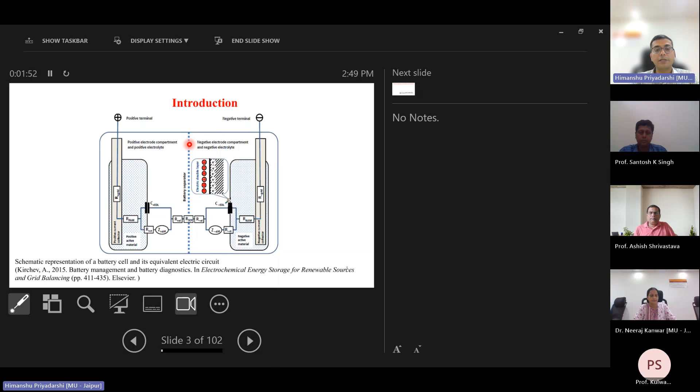This naturally propelled me to think that one has to work at the device level, at the root level of the battery. And then of course there are three pertinent parameters in anything: first is how we procure it, so generation, then the operation, and then its recycling. I have on purpose not used 'destruction' because nature naturally operates on the concept of recycling. So all these three parameters have to be taken out, and that, in a crux, is the motivation and the introduction of it.

So this was the previous schematic, and in this slide I have tried to explain the basic components, because it will be useful as I develop the story of this.

This is the cathode of a lithium ion cell, where the purple balls model the lithium ions, sitting snugly into the lithium LMO or its active material composite. And this is the anode, where again the purple balls represent the lithium ions or lithium atoms, and these two-dimensional networks represent the graphitic layers.

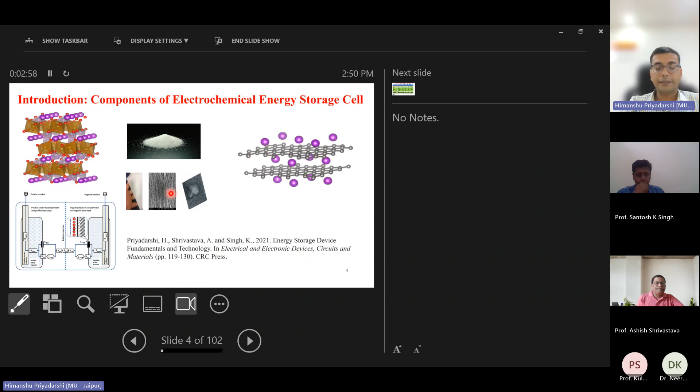And of course, whenever there is a battery, apart from the electrodes, there will be the electrolyte. This represents the salt, and then the separator. The separator is meant to ensure galvanic separation, although there may be ionic exchange between both the electrodes.

The market size is simply humongous because energy storage devices are practically ubiquitous, whether it is Internet of Things, wearable electronics, RFID patches, handhelds, electric vehicles, or renewable energy storage applications. They are everywhere.

The range or the functional capacity in terms of ampere hours varies from milliampere hours to greater than kiloampere hours, and the features are also variegated based on that.

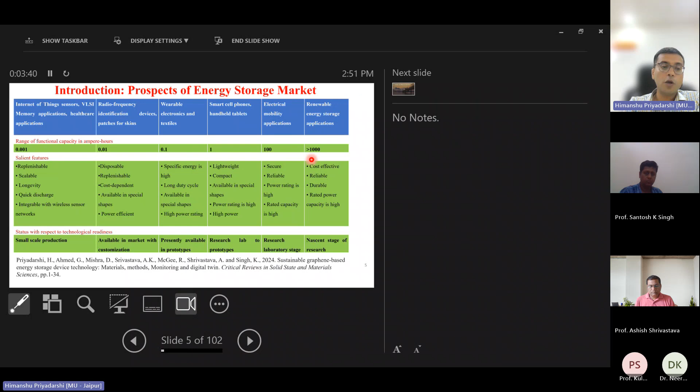Now coming to the motivation. Every time, particularly when I go for a petroleum refill, I look at the meter. It's very costly and it is at the verge of extinction.

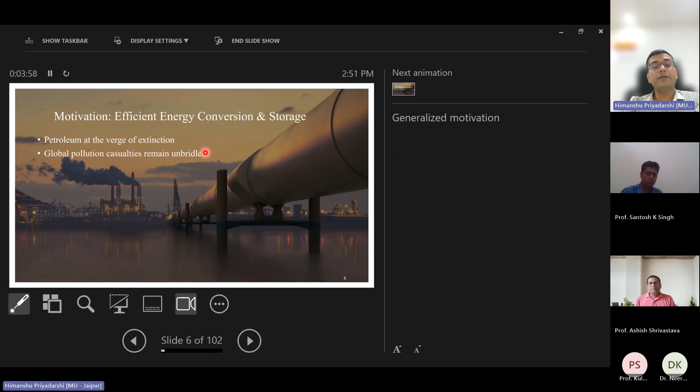Global pollution casualties remain unbridled, more than any other thing, more than any natural catastrophe, more than any terrorist attack. The pollution calamities and casualties remain unbridled.

But side by side, since we are living in a progressive world where we are all interested in improved standards of living, we need more energy per capita.

Another motivation was, when I was studying power electronics, I was simply surprised to know why power electronics devices are required, because the amount of power generated, only one-sixth of that reaches the consumer end.

Energy security is also required, which is very important for any nation. And finally, the motivation was that, being an engineer by profession, I must contribute in my own humble capacity for a technological support system for efficient energy conversion and storage.

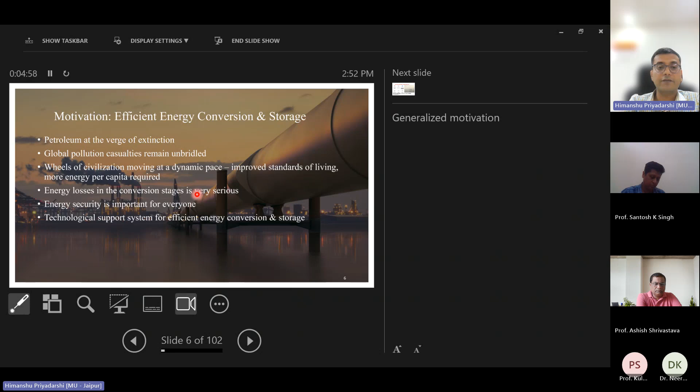The bottom line is that the consumer, the customer, is not much concerned about the inside of it. One of the main motivations of a consumer or a four-wheeler customer is that the quality and comfort should not be compromised.

So finally, to summarize, previously I used to think that the empathy for ecology and environment and the pressure of consumer economics was a dichotomous topic, but actually it depends upon our attitude. It's about convergence also, because for example, we say that an engineer must have a societal sensitivity and environmental empathy.

But unfortunately, when he gets into the research, he is forced by consumer economics. But can we dovetail consumer economics into environment and empathy? Of course, it depends upon education.

So if we think of this as a convergence and not a dichotomy, then the quadruple bottom line of corporate social responsibility - that is profitability, people, planet, and problem-solving platform - all will be achieved.

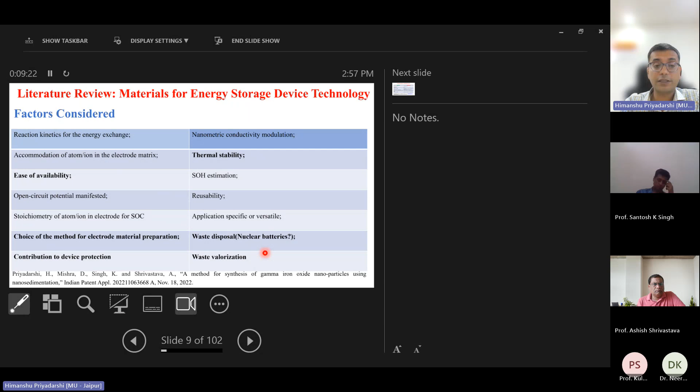I was talking about lithium ion cells, but is lithium ion cell everything, or should we resort only to this option? Of course, it has advantages: lightweight and compact, energy density is commendable, charge retentivity is high, with a good number of charge-discharge cycles, and higher operating voltage. But there are disadvantages too, and as we go further, we'll see those disadvantages.

It is a very water intensive process. Brine extraction is a particularly water intensive method. Brine, by the way, is one of the principal sources of lithium, and it uses an estimated 500,000 gallons of water to produce just 1 metric ton of lithium. There have been reports of aquatic ecosystem damage because of this.

Recycling processes still remain costly and immature. There are debatable theories on this, but one report says that 14 million tons of lithium is left, which corresponds to 165 times the production volume in 2018. So we need to think of alternative materials.

In connection with the previous slide, we can see that we should not tolerate environmental damage. Why? Because all parts of the environment have feelings, and it is our responsibility to protect them. If we dodge this responsibility, we will not be able to dodge the consequences of dodging that responsibility.

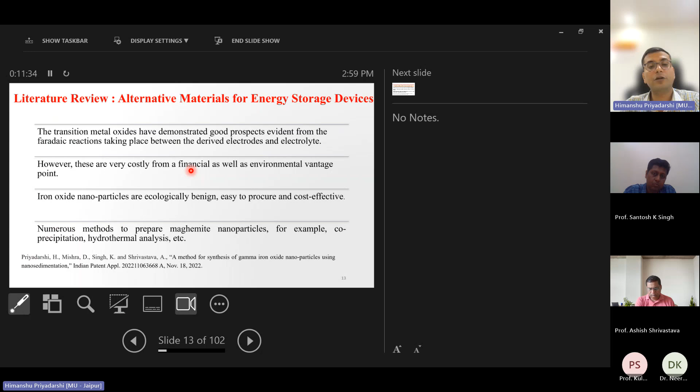But out of these, iron is very useful. Why? Because it is easy to procure, can be derived from waste, and is ecologically benign, as we have seen that the methodology used to make them is very environmentally congenial.

So the point I was making is that when we use iron oxide nanoparticles, or more precisely gamma Fe2O3 nanoparticles, maghemite nanoparticles, the oxidation state modulates between ferrous and ferric - ferrous Fe2+ and ferric Fe3+ - making it capable of catalyzing abundant electron transfer. That is also a good part of this, and people have demonstrated iron ion batteries.

Another aspect is that it is amenable to state estimation - for example, the change from ferrous to ferric. As we go further we will prove it, and it is one of our novel contributions, how we have proved it.

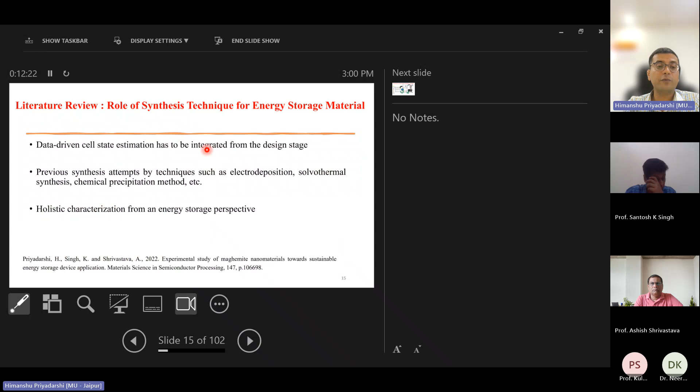Coming to the different aspects, just wanted to have the totality of the picture. This is the battery, this is one of the cells, and we want to make cells from waste. We want to gather that data and share it openly - it's not that we will keep it secret, it's not medical data which needs to be federated.

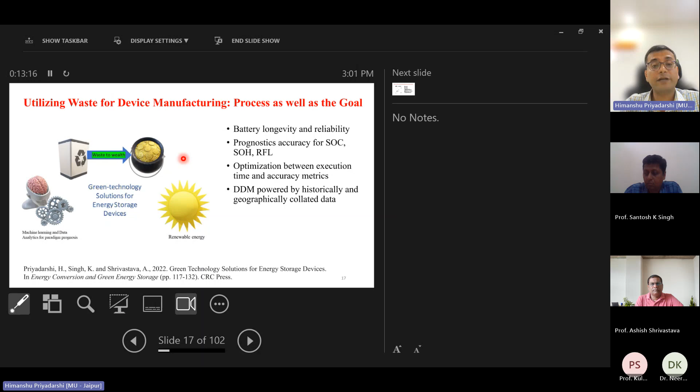Of course, when things scale up, there might be arguments for that. But even if it is federated later, let's say their data is federated, that is not a problem - at least the skeleton will be available. My gut feeling is that if we take such an approach, we will have a lot of benefits, including profitability, battery longevity, and optimization between all the parameters of state estimation.

Now coming to states - this was a literature review regarding procurement. Now what are the different states? State of charge: generally from a macroscopic, electrically observable point of view, state of charge is the ratio of the amount of capacity of the charge remaining in the battery upon the rated capacity.

So now coming to research gaps, having defined the states, the procurement limitation, and the material considerations, the research gap is identified in two parts. This one pertains to the material side, material engineering aspects. Although researchers have synthesized iron oxide nanoparticles, they have not done the doping studies except one, and none have done magnetization studies as far as energy storage considerations. Moreover, band gap studies have not been done.

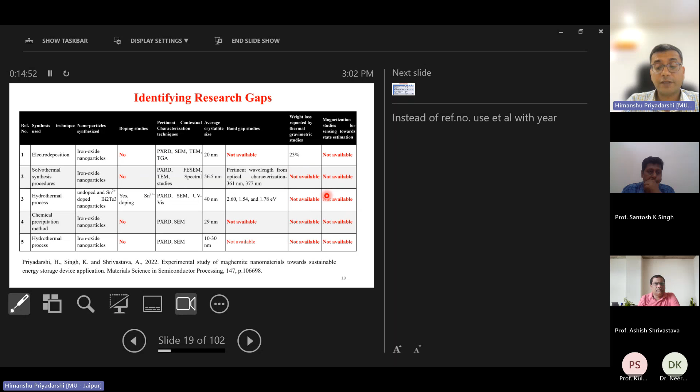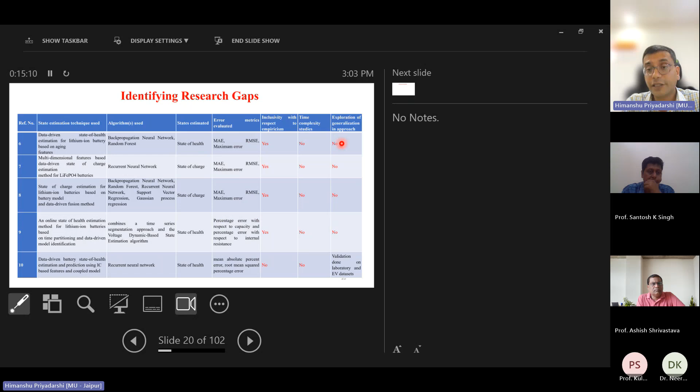These were the gaps, and as far as state estimation is concerned, these are very recent references. The error metrics, if we see, are mostly limited to mean absolute error or root mean square error, but they have not gone to collate it, generalized their model, nor included time complexity studies.

With this, we have identified the objectives and the definition of the problem, which I would like to read. Affordable energy storage is indispensable for attaining the sustainable development goals. Why? We have the ambition that the modern power system should be 100% renewable. A cent percent renewable power grid is required.

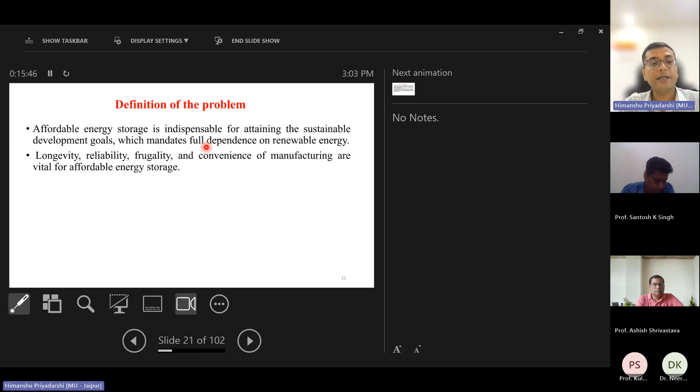So if we are targeting that, affordable energy storage is indispensable, and in that, longevity, reliability, frugality, and convenience of manufacturing are very important. Why? Because the battery has to be long lived, reliability should be there, and each of these is a separate research topic. Frugality and convenience of manufacturing is also there.

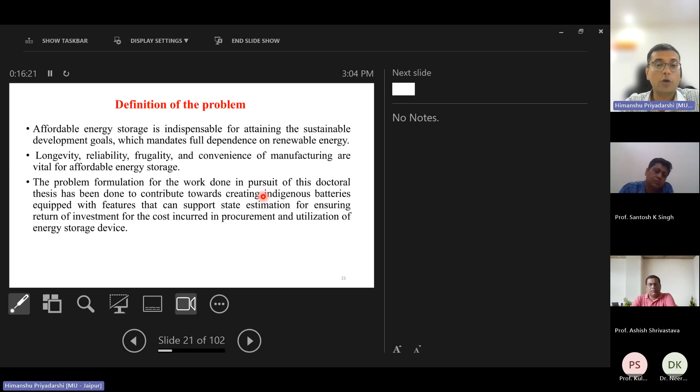So the problem formulation for the work done in pursuance of this doctoral thesis has been done to contribute towards creating indigenous batteries equipped with features that can support state estimation, ensuring return on investment for the cost incurred in procurement as well as utilization of the energy storage device. This is our overall vision. It will be so nice if this can be implemented in a more robust and realistic way.

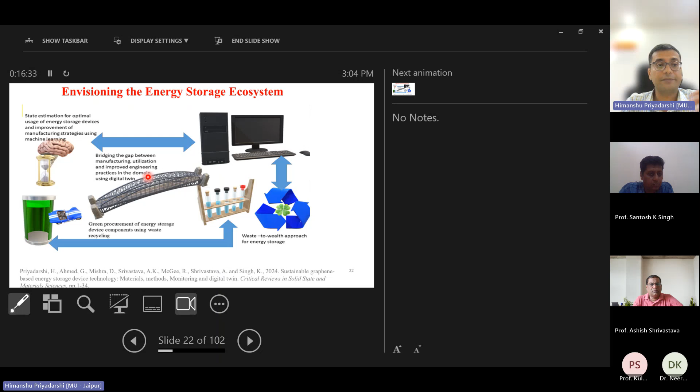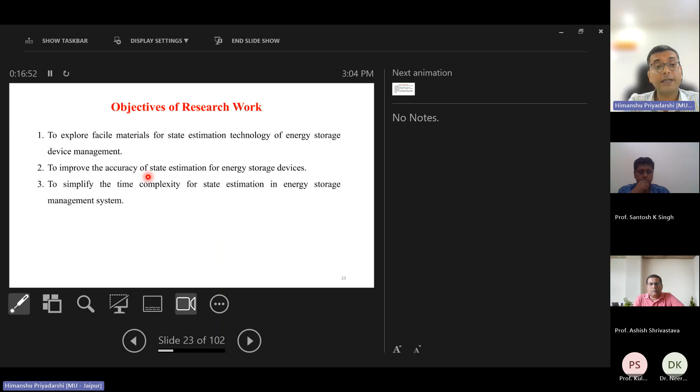Objectives: our first objective was to explore facile materials for energy storage device management and to improve their accuracy. As far as state estimation is concerned, to simplify the time complexity, and to investigate the efficacy of machine learning techniques for energy storage devices. This was objective number 4.

So the methodology, to summarize: choose materials which are locally available, synthesize the precursors, and synthesize the energy storage materials with state estimation amenability, using a data-driven approach. Why am I pitching for a data-driven approach? Because today we have a lot of computational power available, so reductionism is okay wherever required. It may be application specific to use a reductionist model, but data-driven models have a lot to offer in terms of detailing, and by paying careful attention to details we can get things which would have been ignored otherwise.

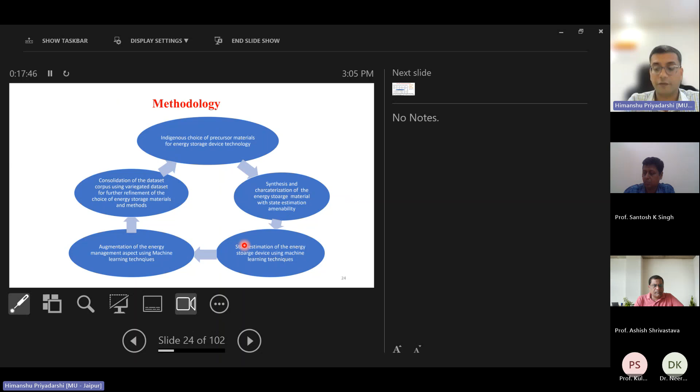Coming to objective number 1, what are the contributions? While exploring for facile materials, we devised a method with which we synthesized our nanomaterial, an energy storage nanomaterial. This novel process sequence optimization has been done in our lab itself, without procuring anything new costly. Scalability has also been explored after the comment by the honorable examiner. We have recently explored that it can be scaled up to 6 times, and moreover it was time invariant also.

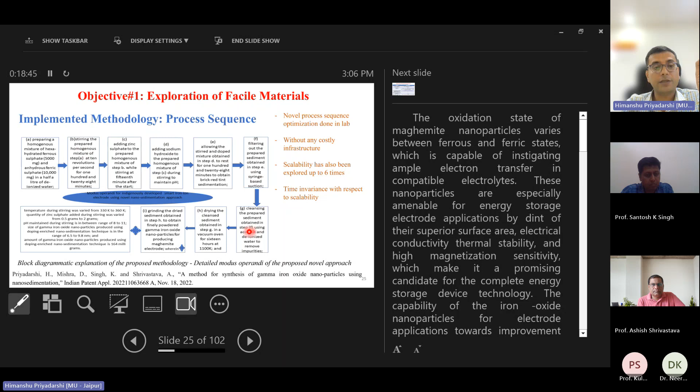So what we did: we took the precursors, the stirring was done at the given specification, then the doping was done, and then the alkaline was added and allowed to settle. Then filtering was done once the sediment was formed, it was allowed to be filtered, then cleansed, dried, and finally it was ready for being characterized.

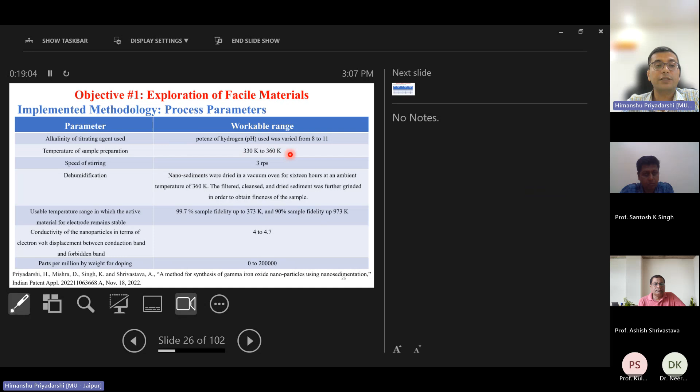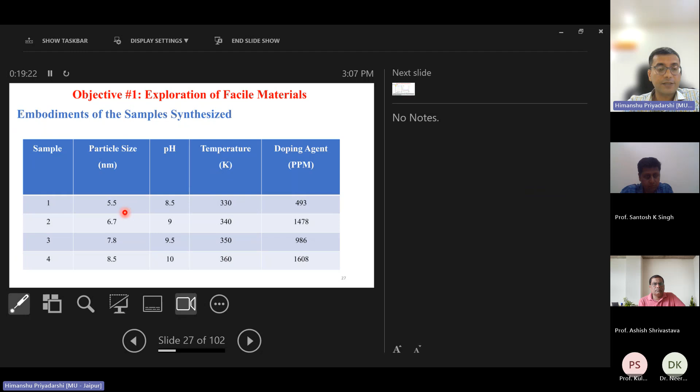These are the different parameters and their workable ranges. For example, the alkalinity of the titrating agent was kept from 8 to 11. Temperature of sample preparation was from 330 Kelvin to 360 Kelvin. The speed of stirring was at a given level. Then these are the different parameters, like the doping level, the temperature, for 4 samples, and their particle size, which has been in the nanometric level — very encouraging for us.

As far as characterization goes, we go first of all for the fingerprint — the XRD. Often by material scientists, the XRD method is called fingerprint identification. For any material, the reference is there.

We need to validate whether the material has been formed or not using X-ray characterization. Side by side, we have also done band gap measurement. Why? Because if we see the band gap of our materials, the maghemite nanoparticles, iron nanoparticles, at bulk level it is 2.2 electron volt, but it has shot up considerably.

So this conductivity modulation again proves that this is amenable for energy storage material. For example, if we go to the introductory slide where I was referring that schematic of the battery, even the active material of the electrode contributes to the resistance when it is connected to the grid.

So all these parameters have to be considered. After all, what is resistance? Resistance, as a lumped circuit parameter, we say that it is resistivity length upon area. But what is resistivity? Resistivity depends upon the mobility of the carriers, and other microscopic parameters.

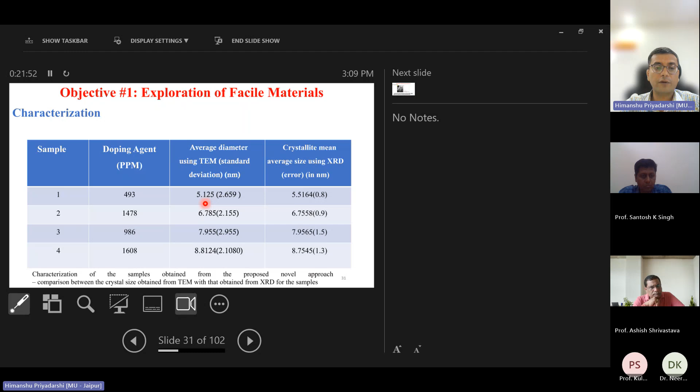Using TEM, if we can make a comparison, the crystallite size which was found out using Scherrer's formula was 5.5 nanometer with an error of 0.8, and using transmission electron microscopy it was 5.125. They are nearly in agreement with each other.

So what we do here, we get the image, and there is an image software which automatically gives us the calculation, the standard size and error, everything it gives.

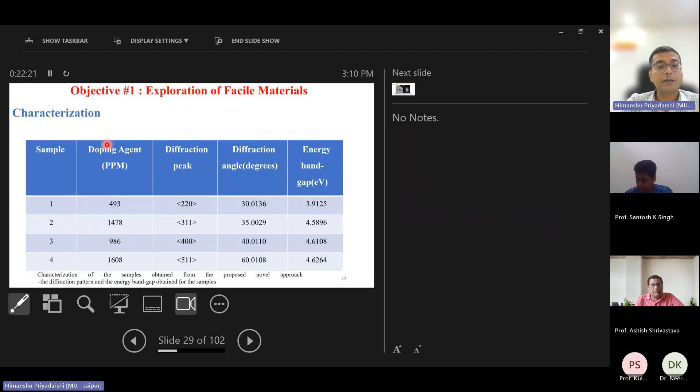FESEM, that is field emission scanning electron microscopy, also confirmed our results that the nanoparticles being formed are in the nanometric range, and the constituents were also in agreement, like iron and zinc. Zinc was the dopant, iron was the main precursor.

Now coming to the alignment with the publication, for this objective we have filed one patent which is under examination. We have 2 journals, and we have these book chapters and conference proceedings.

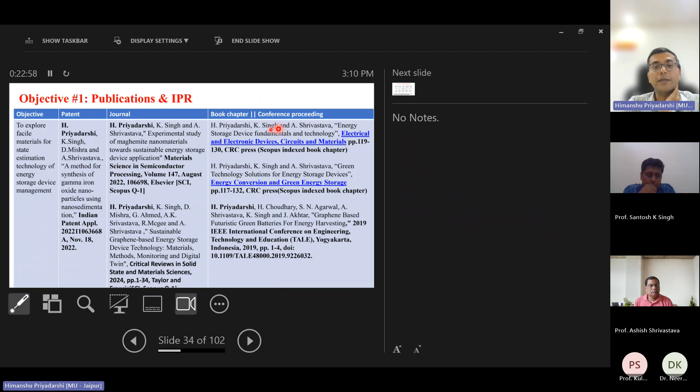Now with your kind permission, I will come to objective number 2: state estimation amenability. Here we need to check the state estimation amenability. So the basic philosophy was that whenever we are trying to develop this novel method which we have claimed, what are the advantages of it?

For example, if we have affordable batteries, it will increase DG penetration. DG stands for distributed generation, and it will overcome the dependence on costly electrochemical energy techniques. There will be more return on investment. It will reduce the carbon footprint, lesser life cycle costing, and better safety also.

If it contributes to the accurate state estimation, if the energy storage nanoparticle which has been synthesized contributes to better state estimation, naturally it will raise the flag that the state of charge has gone to dangerous levels. So that is one advantage.

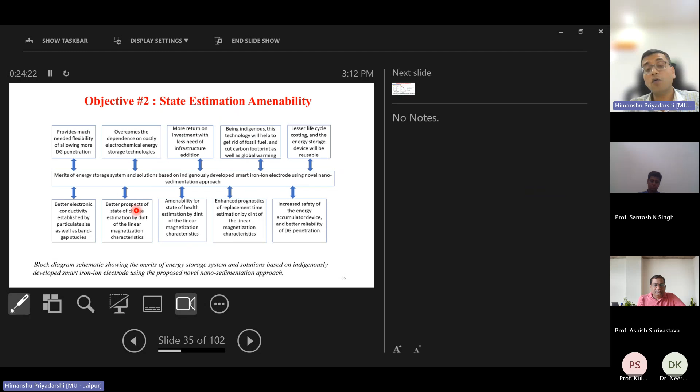Better prognostics, when a battery has to be replaced for being recycled, and all these characteristics. But how do we attain that, that is what we are going to establish here. I mentioned during the research gap identification that magnetic characterization was one important gap which we have addressed.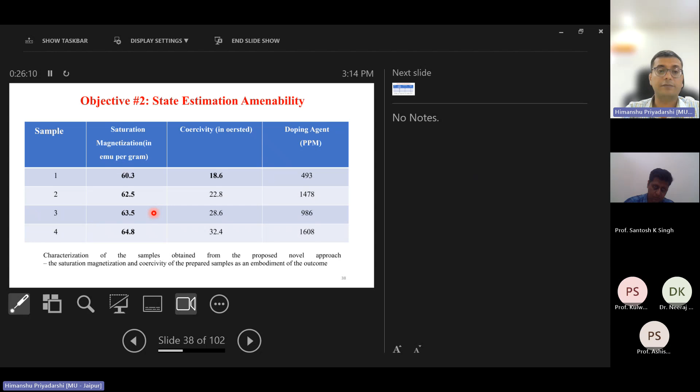The coercivity also we have calculated with respect to the different samples. Compared to the bulk, which comes up to 50, or sometimes 60, it is very much comparable, and what we are more interested in is the linearity of this curve. Going further, thermal characterization also has been done. Why is thermal characterization important? Take any electronic device, it becomes hot, and there are local hotspots - it's a pertinent power electronics problem. Even batteries also become hot. Recently I was testing a Quine supercapacitor cell, and it became hot within 1 or 2 minutes. Anyway, the point is that for this material, we observe a kink at a much higher temperature, 400 degrees Celsius, and here at 600 degrees Celsius. Otherwise, it is more or less thermally very stable.

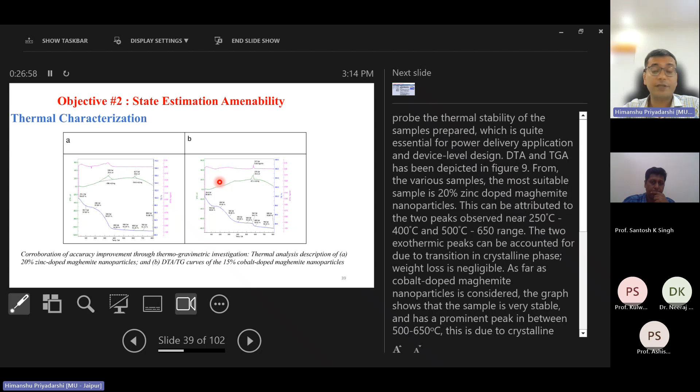So we started with objective 2. The motive behind objective 2 was to prove that the state estimation amenability of the materials we have synthesized is convincing, and using thermal and magnetization characteristics we have attempted to prove that. Towards this, these are the publications. Objective 1 and 2 are quite related.

These are the book chapter, the conference proceeding, and the journal. This journal is in Material Science and Semiconductor Processing, and this one is in Critical Reviews in Solid State and Material Sciences, and the third one is under review. We have received very minor comments, and we have communicated the responses. We are very hopeful it will soon be accepted.

Now objective number 3 and 4 have more to do with macroscopically observable effects, like am I able to get better time complexity for state estimation? What is the time complexity for the state estimation?

Now if we see this, this is my energy storage management system associated with the appliance. Let us say this is connecting with different energy harvesting equipment. Related to every energy harvesting equipment, there will be a power conditioner. For example, if it is a solar panel, there will be a DC to AC converter. If it's a wind-based energy harvesting equipment, there will be a power conditioner of another nature.

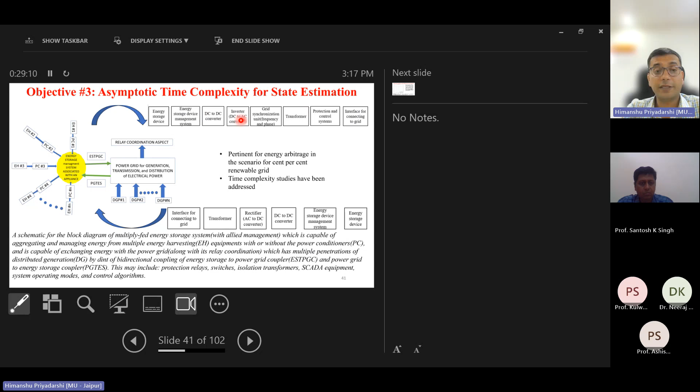And then when the energy storage management device interacts with the grid, there has to be an energy storage to power grid coupler, and a power grid to energy storage coupler. The honorable examiner motivated me to add this block diagram to explain what I mean by this ESTPGC, using a block diagram. So that also has been done.

So if we take a cell and observe its charge-discharge patterns over a given span - because charge-discharge patterns can be over one cycle or across different cycles - of course, when state of charge is calculated, it can be calculated across a charge-discharge cycle, but when state of health is calculated, it spans across different charge-discharge cycles.

So this is a time domain description of cell potential, graphically represented. What does it mean that C rate is 7.5? For example, a C rate of 7.5 implies that if the cell were discharged with 7.5 amperes of current, it would be functional for an hour. And if the same cell were discharged at 15 amperes, it would be functional for half an hour.

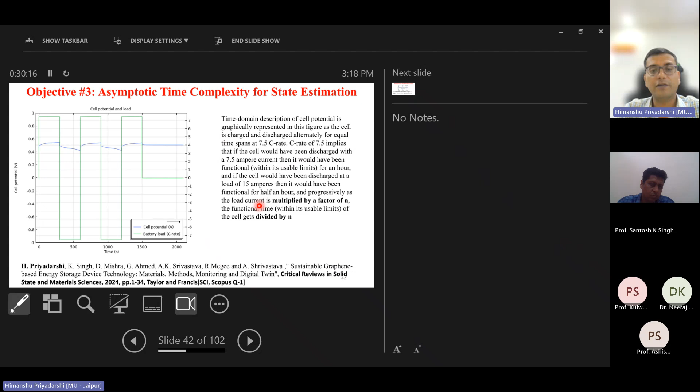So time complexity is important. Why? Let me explain - it's a very pertinent example that drives home the point. I am driving an electric car, and my meter is not able to show that the battery state of charge is low - that is very dangerous. Therefore, accuracy is very important, and moreover, timing is very important.

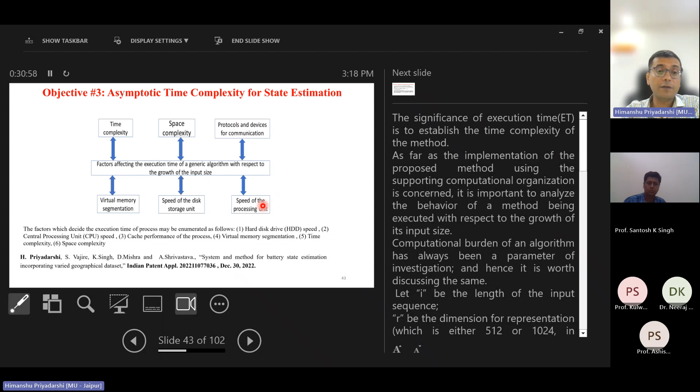So what are the factors which affect the execution time of a generic algorithm? Time complexity, space complexity, protocols and devices for communication, speed of the processing unit - these are the different factors which we need to consider.

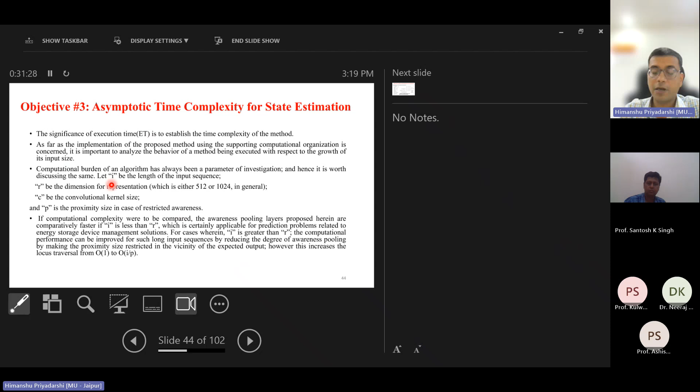But of course, we are talking about the execution time. Why is execution time important? Because as far as the implementation of the approach which we have considered for simplifying the time complexity, we have considered certain parameters. Let me define them: i is the length of the input sequence, R is the dimension for representation, C is the convolutional kernel size, and P is the proximity size in case restricted awareness is required.

Why am I not using only a single one? Because there are advantages. When we use parallelization of individually aware parallel models, our time complexity decreases, and finally it is linearly connected again. There is scope for superposition and normalization again during representation, and finally encoding, and then the probabilistic output is stored.

How does this architecture work? The input sequence from the data procured, along with positional encoding, is vectorized and passed on to a fully connected layer or linear layer, and then passed on to the identity awareness pooling monolayer. These are the monolayers of parallelization.

Awareness means that it is aware of its vicinity. People use different names for it also. Sometimes they use the term attention mechanism, but we have on purpose used a different name because of different functionality and novelty here.

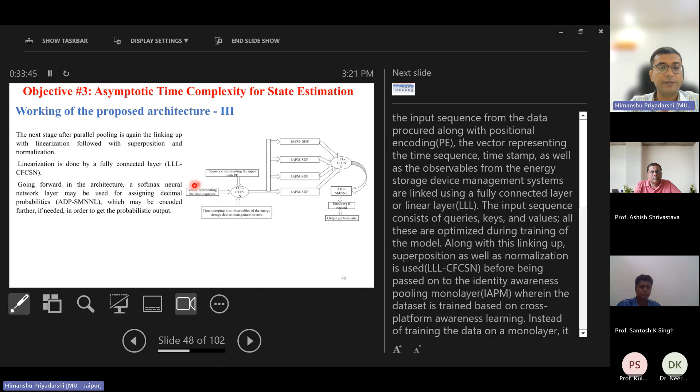And finally, as far as the activation function is concerned, we have used a softmax neural network layer. The reason being, softmax is differentiable and easy to compute gradients, and it is very helpful where probabilistic output is being given.

So what is the workflow we have used for this architecture? We have appended the data received from the sensors attached to the hardware with historical data collated from varied geographical sources, and then used statistical tools to perform data pre-processing, which might involve data cleaning, feature extraction, and analytical insights. Then the data was split into training, testing, and validation ratios, and we empowered the proposed architecture through training, testing, and validation in multiple epochs for obtaining the best possible accuracy of the error matrix.

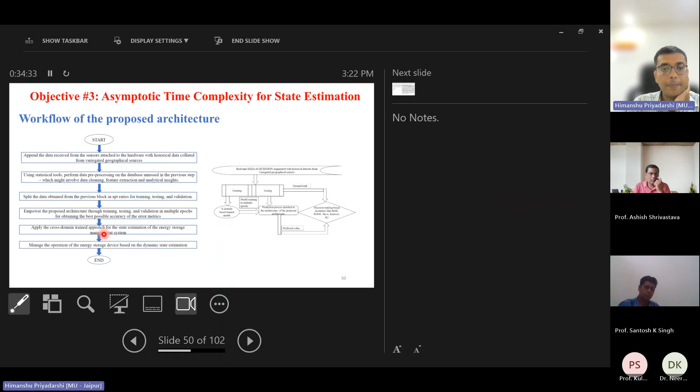So what we do is fine-tune our model based on learning from different models. Actually, the basic philosophy of this is very simple. In fact, the basic philosophy of machine learning has been utilized here. It is not very difficult to understand, although it might look complicated in terms of the mathematical model, and it looked that way to me also.

But machine learning, as defined by Tom Mitchell, is very simple: only three parameters—experience, performance, and metrics of performance. So the more a model becomes experienced by training it on different datasets, the better performance measures are expected. Therefore, this philosophy of cross-domain learning, which we have detailed here, comes into play.

And when we have represented only pertinent results here, there are many other methods by which we have done it, but we have represented only the pertinent methods. Why? Because we wanted to find the asymptotic time complexity.

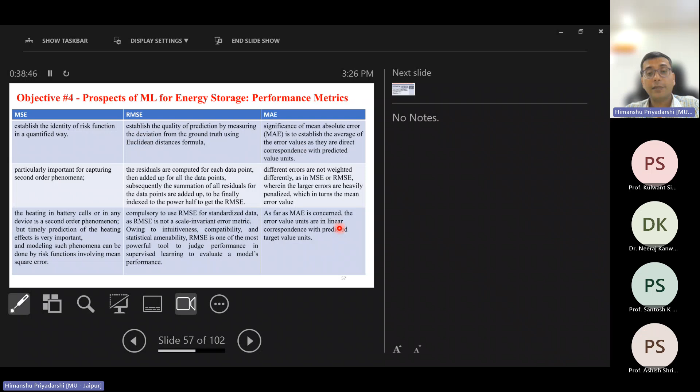And why do we use mean absolute error? Because it is very significant. Now what happens when we are using mean square error and root mean square error, the penalty is also of the second order. So mean absolute error is also important because it is in linear correspondence with predicted target values.

Another important aspect is coefficient of determination, particularly for our work. Why is it significant? Because it establishes the measure of variance in the dependent vectors which is possible for the independent vector to explain. Mathematically, it is defined as the ratio of sum of squares residual errors and sum of squares total, where sum of squared residual errors denotes the cumulative variation of all the predicted values available on the regression curve, and SST signifies the cumulative variation of actual values from the mean value of all the instances of response variables.

The value of R squared error, coefficient of determination, is between 0 and 1 for the training set, and higher the value of R squared, better is the regression model. If this factor becomes negative, it means SSRE exceeds SST.

And why is it important? Because if we want to predict the quality of a predictive model, this is very important, since we are collating data from different places. We have our own data sets also, we are collating it from different data sets. So in that case, it is very important to use it.

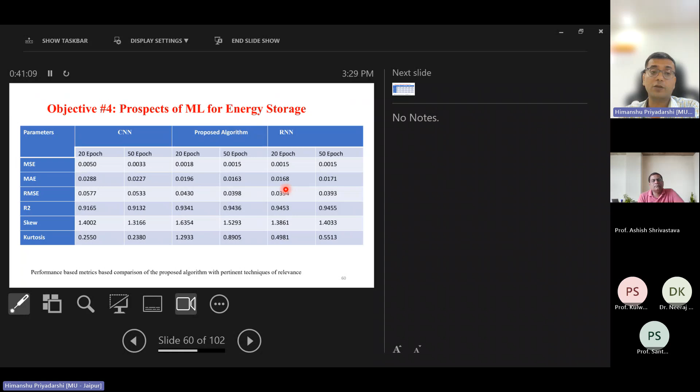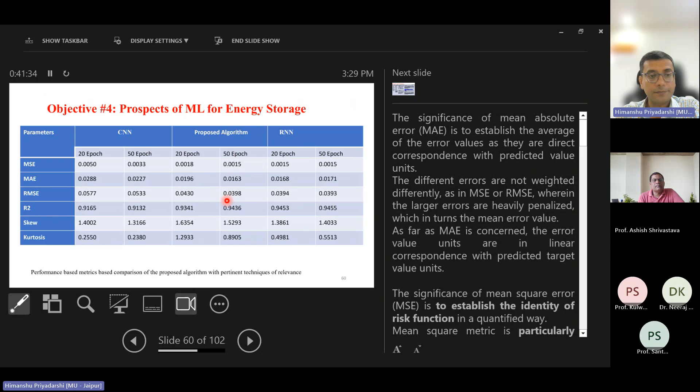So in terms of this, these are the results for CNN and RNN. These are the different values of MSE, MAE, and our proposed algorithm is giving better accuracy in terms of MSE, mean absolute error, and root mean square error also.

And R square error nearing 1 as we go back. If we go back, the ideal value is 1. So this is very much desirable, it's near 1.

So these are the publications related to it. We have a patent, of course, this patent also is related with objective 3, because objective 3 and 4 are related. We have a journal, and this again is communicated. These are the book chapters and conference proceedings.

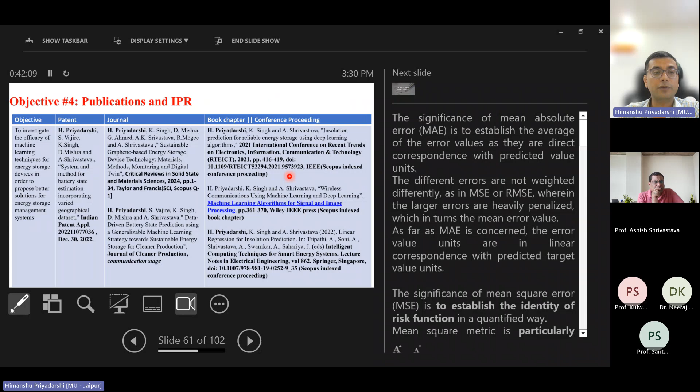Now coming to the response of examiners' comments, which I will be answering as I proceed further.

With due respect, sir, I am really grateful for this comment, and I have curtailed my abstract to 2 pages to ensure that the essence is not compromised, and at the same time it is compact.

So what I did, I found out nearly 16 instances, mostly in the first chapter, and I searched all such strings and removed them in compliance with this very important comment, sir.

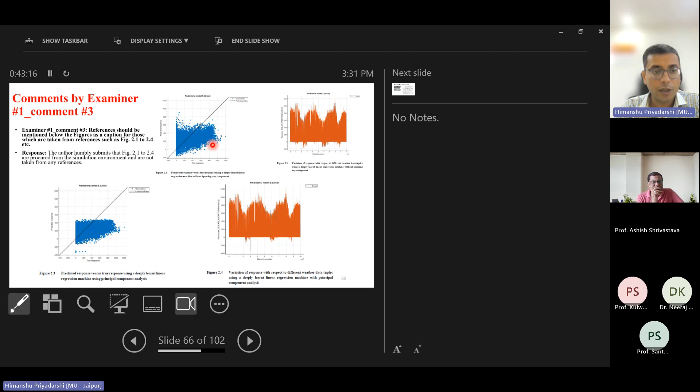The third instance was that references should be mentioned below the figures as a caption for those taken from elsewhere. Sir, actually these figures have been generated by me on a simulation platform, MATLAB.

The fourth comment was that I highlight the gaps in the previous work. So, sir, this has been done in table number 3.3, where I have highlighted the gaps, and this was the same table which I used for my objective formulation, sir.

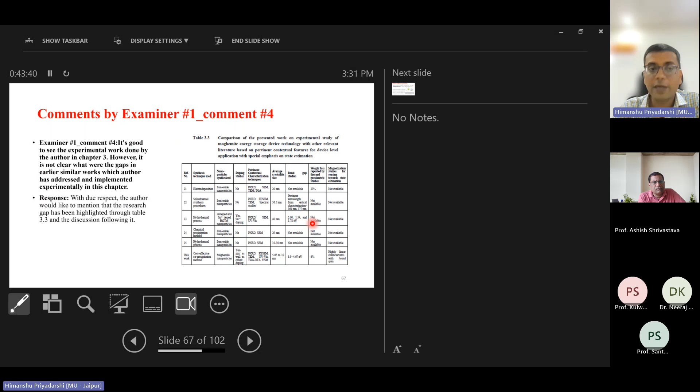This comment was that the author should include the schematic of ESTPG and PGTES before section 4.4.

Thank you very much, sir. This was very important for me, and I realized that it will add value. So I have added the block diagram of the energy storage to power grid coupling, where after the energy storage devices there is an energy storage device management system, which is an integral part of any storage device.

Then there has to be a DC to DC converter, which is the power conditioning module. And then there is a grid synchronization unit, the transformer, protection and control circuit, and interface for connecting to the grid.

The second is power grid to energy storage coupling. So from the grid, there will be a transformer, then the power conditioner, rectifier, a DC to DC converter, and then the energy storage devices along with its allied management system.

This was, I am very grateful for, of course, all the comments. They have considerably enriched my work.

This comment was that I do claim that this setup is cost effective, but I realize with this comment I need to see whether it is scalable, or whether it will remain cost effective even if it is scalable. So, sir, after I received your comment, I started working in the lab.

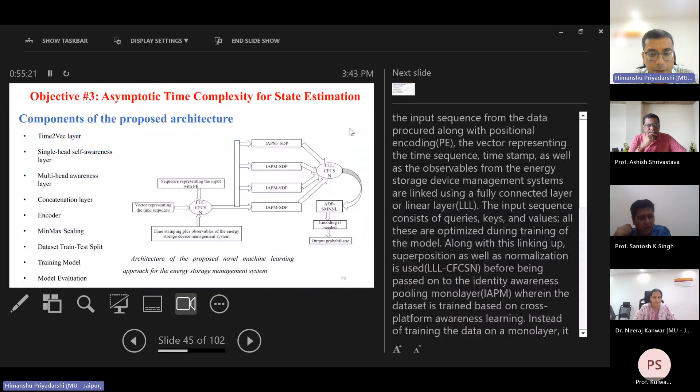Just one last note regarding the presentation: you mentioned in slide number 37 something about magnetization characteristic, MH characteristic, that was there in respect of some samples. Yes, sir. 37, yeah. So I'm just wondering, you are doing this characterization for a material which is meant for energy storage, and that too is more or less kind of a capacitive, or you may say some batteries, etc. So what made you go for the magnetization characteristic of this particular material?

So actually, it establishes the linearity of the material. Like, once it is linear, let me explain sir. What happens when we try to measure the state of charge? One approach is the atomistic approach. The researchers have defined, experts have defined, the state of charge in an electrode as the amount of ions—let us say how many lithium ions, if it's a lithium ion electrode, how many lithium ions are there. But to measure that is very, very tough. So that is the atomistic definition of a state of charge.

Another definition, if we come to an electrically observable definition, it says present capacity, remaining capacity, and rated capacity. But what happens is that in any energy storage cell, if this can be sensed—whether it is exhibiting linear characteristic—it will clearly prove that the active material is still active and is still contributing to the electrode matrix. It is still contributing to the electrode matrix. So that is the point over here, sir.